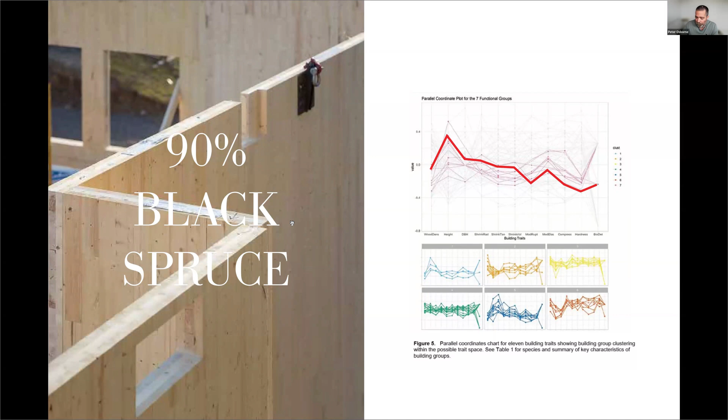And the concern about that is that black spruce responds to only a single functional characteristic, a single niche within the ecosystem, and may not have resiliency in many ecosystems, many regions of North America, especially in Canada, and could actually have changing forest composition, which would impact their future provisioning of that wood in the future. So architects essentially have many blind spots.

So thinking about how our forests are changing and how wood building and the provisioning of a monospecies wood will impact the carbon resiliency of our forests is important.

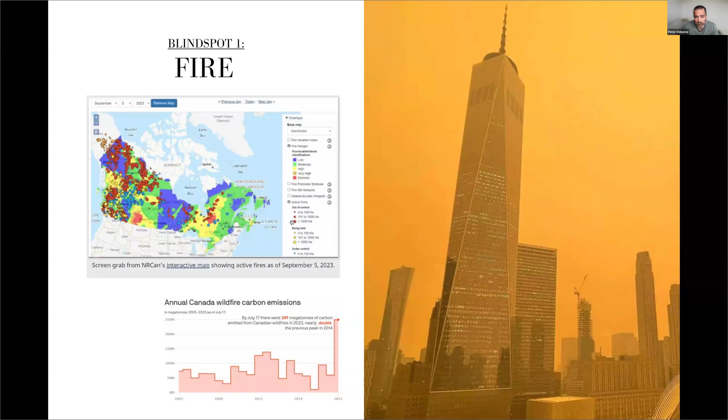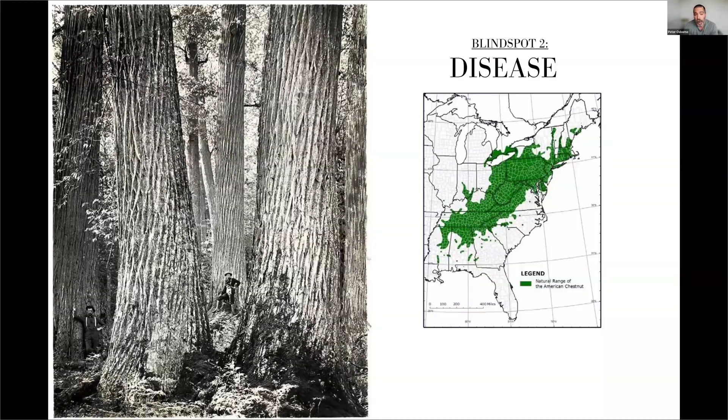The second one is disease. This may be a prolific image that you all know, but many architects won't recognize that this is a historic image from the East Coast of the United States, representing the American chestnut. It's hard to believe that we used to have such large timbers on the East Coast, but through the disease American chestnut blight this was decimated across all of Eastern North America, and something we don't see anymore.

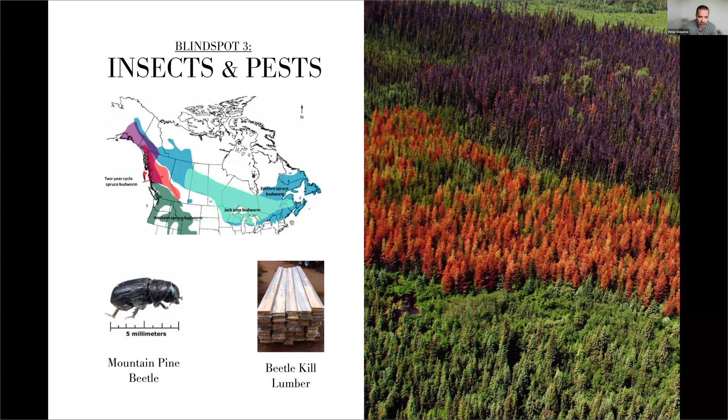A further one we don't see is the impact of insects and pests on our forests. And this starts to hint at what we call a forest building approach, where some of the beetle kill lumber is actually being harvested for high value finishes. We're able to remove some of this timber from the forest and utilize it to then support forest regeneration efforts, et cetera.

And not only are these things all blind spots, but the impact of climate change, the accelerating effect of indirect, direct, and interaction effects of climate change and all of these other disturbance characteristics is massively impactful on our forest ecosystem structures. And in this article from 2017, Seidl et al. concluded that ecosystems and society must be prepared for an increasingly disrupted future of our forests. And this is something we really need to take into account from the construction industry.

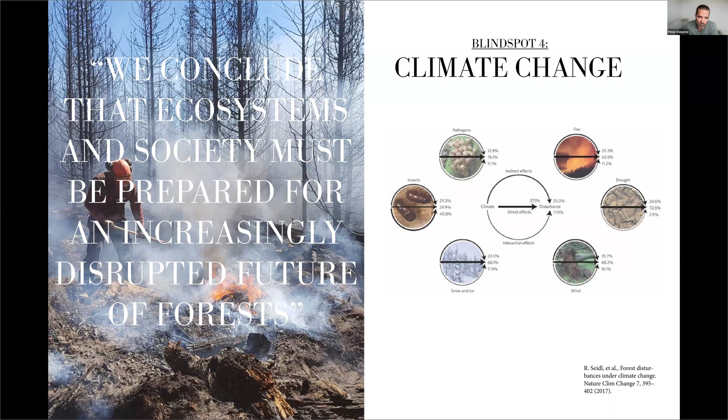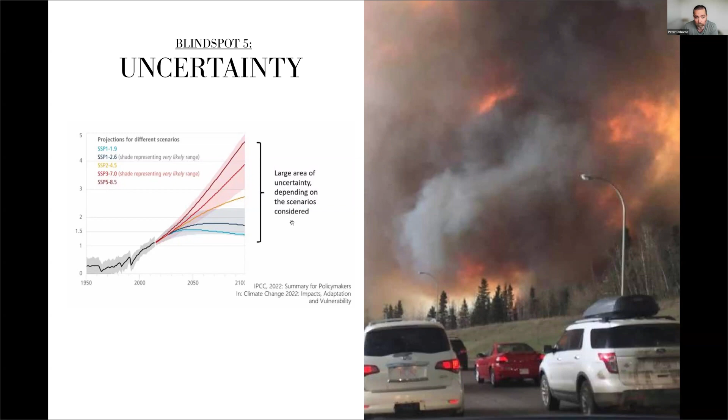Finally, on top of that, the massive amount of uncertainty that we have towards the projected futures of our climate change will really impact the ongoing provisioning of wood, and something that builders and designers and engineers need to begin to think about a little bit more. So in general, what I'm proposing here is buildings tuned to the history and successional dynamics of forests and plantations.

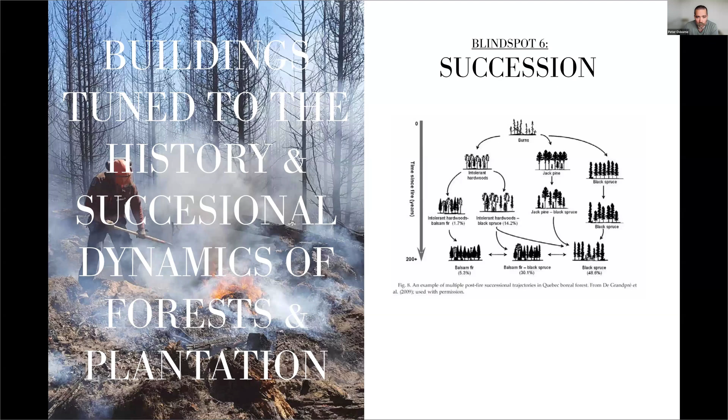So builders and designers that understand how forests change and how they can support that change, as opposed to one which applies a top-down approach that demands a certain type of wood from our forests. So just as ecologists have moved from species to functional traits and created new forests in the process, what I'm proposing here is buildings need to move from building using certain species like SPF commercial groups to a building trait-based approach towards construction.

And by doing this, we'll extend the ecological concept of plant functional traits to building. And plant functional traits and building functional traits are extremely relevant. From an ecological perspective, the functional traits, and I'm sure this is something you all possibly have deep knowledge of, could be things such as wood density, seed mass, height, specific leaf area, leaf nitrogen, drought tolerance, shade tolerance, and root depth. Whereas on the building side, they can be anything from the physical and mechanical properties, thermal properties such as emissivity and diffusivity, biodeterioration or rot resistance, fire resistance, and suitability for wood preservative applications, bonding, finishing, etc.

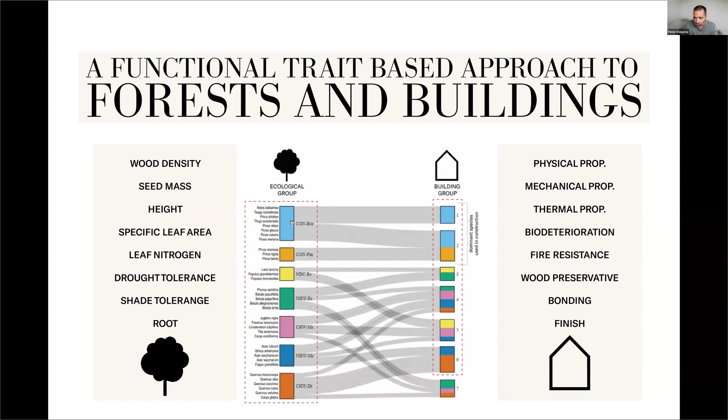But what we found was when you look at the dominant species used in construction, so SPF species, spruce, pine, fir, mostly softwoods, they only respond to essentially two ecological niches in the region that we studied. And this is obviously because they're all softwood species dominant, particularly. So how can we begin to think about expanding our wood building practices such that we can support the utilization and the diversification of our forests in order to support their resilience overall?

So the one way we tested this was to apply this kind of approach on the Centre du Québec region. We leveraged the study by Marco Mina et al. from 2022, where they looked at different forest management approaches and climate change impacts on increasing the resiliency of the region. And they had never studied the harvest output. So we leveraged the harvest output data for that study to assess the social and ecological impact of climate change and forest management change on this region.

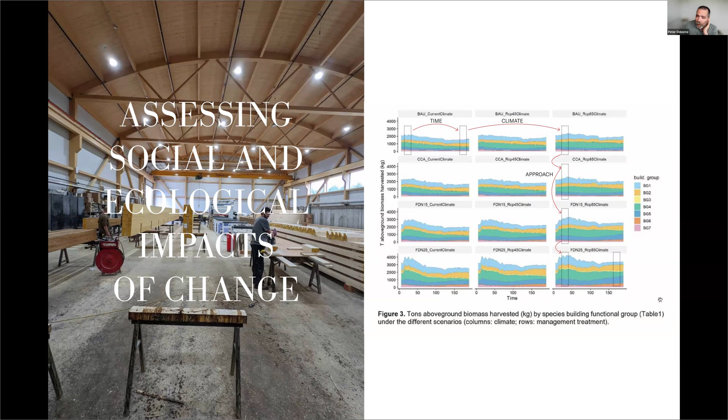So we were able to assess the impact essentially of time on forest harvest output, of climate on forest harvest output, and then different management approaches on forest harvest output. And what we found was that when forests were of low functional diversity, when the forest management was business as usual, we had relatively low functional diversity of wood utilization. So we were dominantly needing to use building groups 1 and 2 still, whereas we still had significant amounts of BG4, which is typically hardwoods, maples, and a few others.

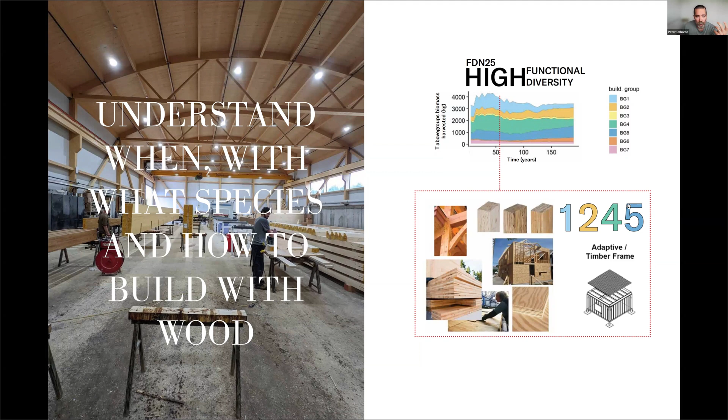But as we increased to the highly functional diverse forests and high climate change, we actually found that we drastically increased the harvested output of both the standard SPF commercial group species, so building groups 1 and 2, but also building groups 4 and 5 substantially increased. And what this allows us to do is to really understand when, with what species, and how to build with wood. And what this really pointed towards is the need to really find value in unutilized wood species.

So you're seeing here on the right in this chart, as essentially the forest becomes more functionally diverse, and here in the bottom right, we didn't find necessarily that we increased substantially the SPF species, as those weren't the ones that were needed in the region. But what did actually end up happening was over the course of the entire 170 or 190 year study period, we dramatically increased the harvested output of building groups 4 and 5, which points towards the need to find value and find utilization for those wood products in long-lived carbon stores such as buildings.

So moving to the second part of this study, this is a forthcoming article called Wood in Transition, Diversifying Wood Construction to Cope with Forest Change. We looked at ecological indicators of resiliency. So the three of them we identified were species richness, functional diversity, and functional redundancy. So species richness is obvious, essentially the number of species that can be attributed to each product.

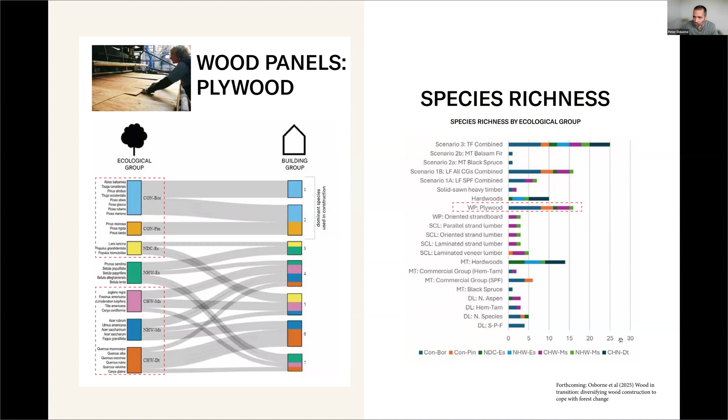So when you begin to assess this, you can look at how products like dimensional lumber of commercial group SPF have 4 species which they can utilize. Whereas when you begin to increase it to all the different commercial groups, you can aggregate them together and substantially more species are able to be utilized in them. And then comparing that to a product such as plywood, we found there were 17 different species available within the plywood market. And that makes that product a slightly more resilient product to change as they're able to adapt their systems.

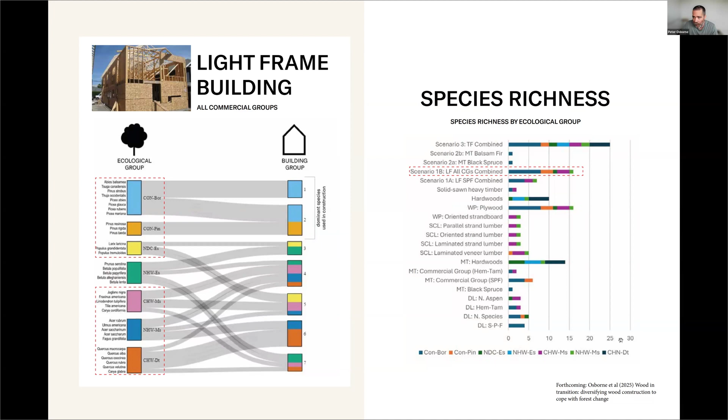And then finally, when you aggregate these things together into a construction, we're able to find even more benefits, where the SPF species and then the plywood together provide a unique combination. Where this becomes particularly interesting is when we begin to look at these other ecological indicators of functional diversity and functional redundancy. I'm not going to go too far into the depth of this, because I think Christian has probably introduced it and many people here know the concept in general.

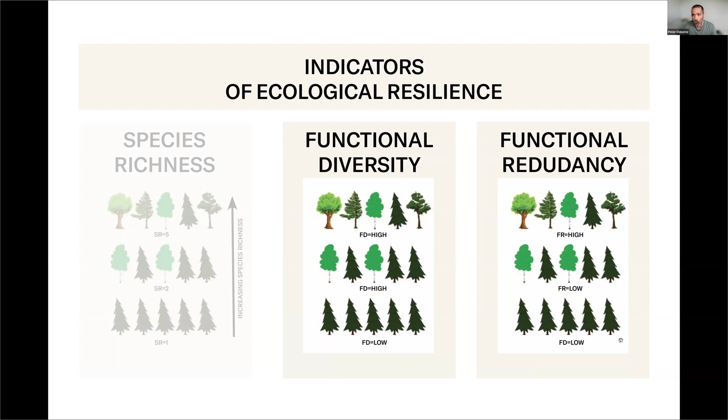But essentially what you want, for a highly functional diverse forest, is species which have ecological traits that are varied in their response to different disturbance characteristics. And you similarly want highly redundant forests, which have functional overlaps between their species as well.

So when you begin to look at the wood product characterization according to their functional diversity and functional redundancy, we find that products such as mass timber, which are a single species, typically have extremely low functional redundancy and functional diversity, as they only have one species typically that they're using, possibly one or two. This chart here is only using a single species approach.

Whereas products such as dimensional lumber often use significantly overlapping species, so many softwoods, and have a high functional redundancy but a low functional diversity. And comparing that, wood panels such as plywood, OSB, LSL, and those varied products which can utilize a higher variety of wood species, begin to develop into a much more highly functional diverse approach.

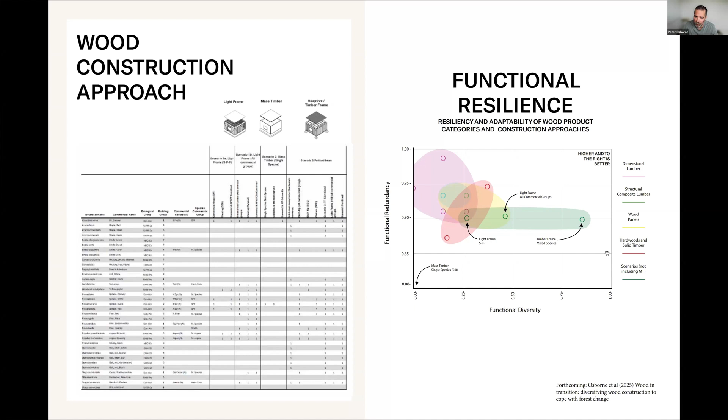And in combining these products together through light frame construction using all commercial groups, and through timber frame or this mixed adaptive approach, which utilizes timber frame, light wood, wood panels, etc., are we able to actually have a highly functionally redundant and highly functionally diverse forest.

So you can begin to understand how the forest management approaches that we're proposing, highly functional redundant, highly functional diverse forests, would be best supported by an adaptive approach which is able to use the most species, whereas a mass timber product would possibly align itself best with a very simplified forest. It's quite a simple concept, but depending on the direction you're going here, if this is a demand or a supply side approach, that really has an impact on how we're working with our forests and our buildings.

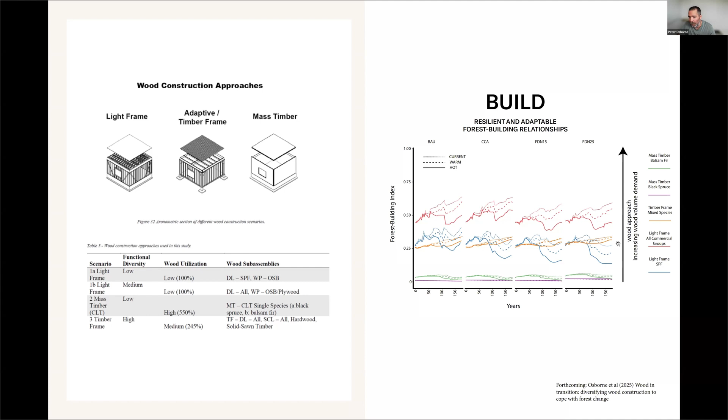But what's particularly interesting about these tables and charts is that you can see how in the timber frame mixed species, the line is relatively flat, which shows something about the impact that will have on the industry in general, showing that, as climate change moves forward, as these disturbances occur, the industry is able to shift and adjust itself in order to maintain consistent supply. Whereas the light frame approaches are impacted quite considerably depending on the different climate change scenario that we're looking at.

So finally, I want to talk about the carbon impact, because that's really where this question began. So this second forthcoming article that I'm writing in collaboration with the Canadian Forest Service, on enhancing forest carbon sinks through functionally adaptive wood construction, will be coming out hopefully this year.

But my question here is really, what is the impact of a functionally adaptive building practice on the land-based carbon pooling potential of buildings? So again, we utilize the same study region, and we really wanted to understand how much carbon can be stored in the wood-based carbon pool of this forest region. So we developed a species-level forest carbon model using the Harvested Wood Products model developed by the Canadian Forest Service, where we looked at essentially everything after the forest.

In further studies, I'm hoping to actually include the forest carbon into this, because I think that's a really critical element, but this is the system value that we're looking at. So everything from the production to the use in building and then its eventual end of life.

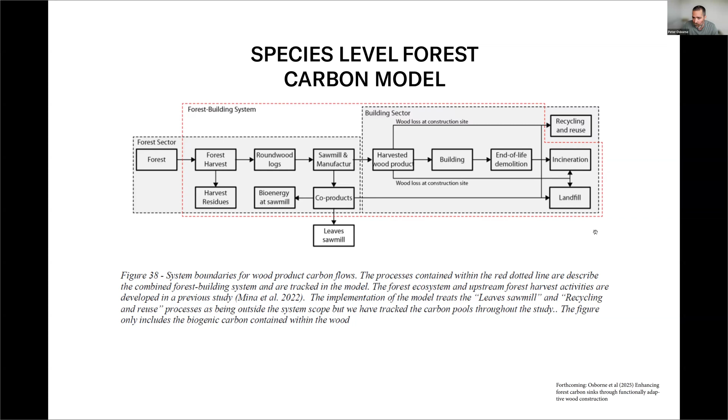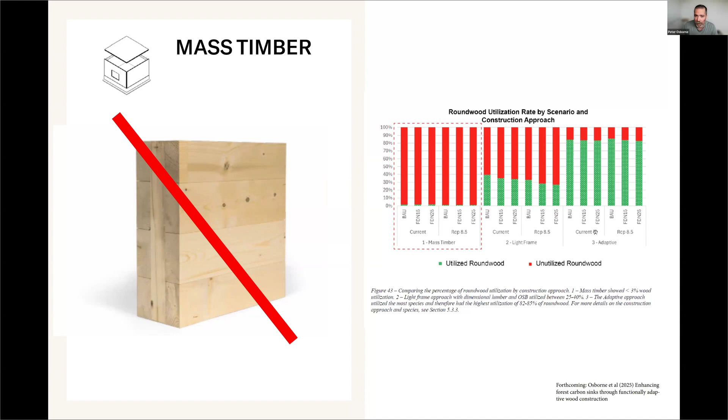And what became really evident when you looked at the utilization rate by each scenario for this region especially, is that mass timber was just not at all suitable. There wasn't enough of the species that was utilized in it. Whereas when you look at light frame and the adaptive approach, we're reaching something around 40% for light frame and upwards of 80% utilization for the adaptive approach.

It becomes particularly interesting too when you look at the changes between the low functionally diverse forest and the high functionally diverse forest, where you're seeing a pretty considerable increase in wood species utilization. So the diversity of wood species, which was evident in the last paper that was discussed, but as well as the significant quantity differences and changes over time or between the two scenarios.

So what's important to think here is how does the building's fingerprint match onto the forest output that we're seeing? And then finally, the other element that we really wanted to jump into is the actual byproducts that are coming out of these different approaches. One of the really important aspects of this is the percentage of utilizable wood within each of these approaches. Softwood species often have around 80% utilization, whereas hardwood is more around 45%. This is a broad generalization, and I'd love to get into conversation about more specifics on this with the group.

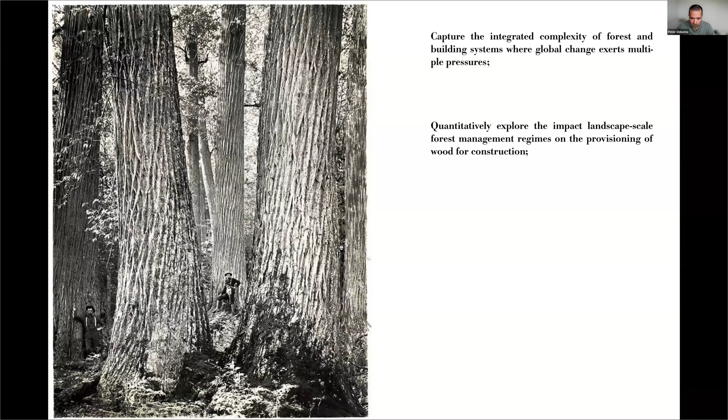When you say all wood harvested, so essentially the mass timber scenarios assume only the black spruce, or I think I had one extra species here. Sorry, let me go back to the relevant one. So there were 2 scenarios where I looked at the mass timber, using balsam fir and using black spruce. Black spruce was the one that's regionally appropriate or utilized. It exists in Canada as Nordic mass timber, mass CLT. Balsam fir has been utilized in other regions. I don't know specifically in Canada if it's been utilized right now, but at the time of the study, there were other regions using balsam fir. So those are the only 2 species that were utilized in the mass timber scenarios.

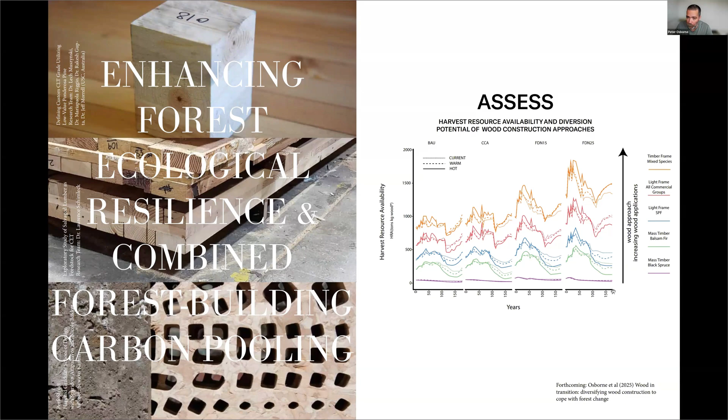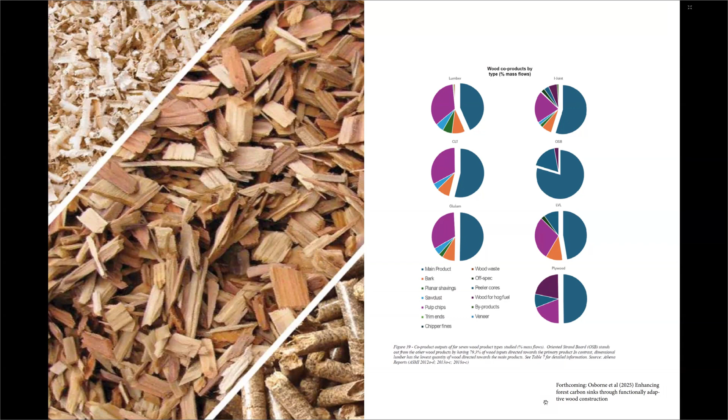And then when you look at the utilization for each of them, you're seeing essentially the co-product. So roughly 55%, more or less, of the actual wood product made it through to the building at the end of the day. Does that answer your question, Matthew? Yeah, thank you, Peter. I guess it assumes that for all the other species, nothing else is harvested. No, it's harvested but not utilized in long-lived wood products, i.e. buildings. Oh, I see. Okay.

Yeah. So essentially the adaptive approach is one which assumes a flexibility in the system, right? So it allows for there to be a CLT diaphragm under some scenarios. It allows there to be post and beam kind of structure frame, and then light frame infill, if you understand the kind of concepts I'm talking about within the construction system. So there's some more work I think to do on diversifying the different scenarios and being very specific about them. And that's where we're going with this study.

Great, really interesting work. Thank you. Thanks, Michael, happy to talk more about it. Yeah, for sure.

Our next question comes from Clément Hardy. I'm curious to better understand the relation between the numbers that concern the increase in carbon stocked, one of your last slides. If I stock 100% to 300% more carbon in buildings, does that also mean that I harvest 100% to 300% more wood?

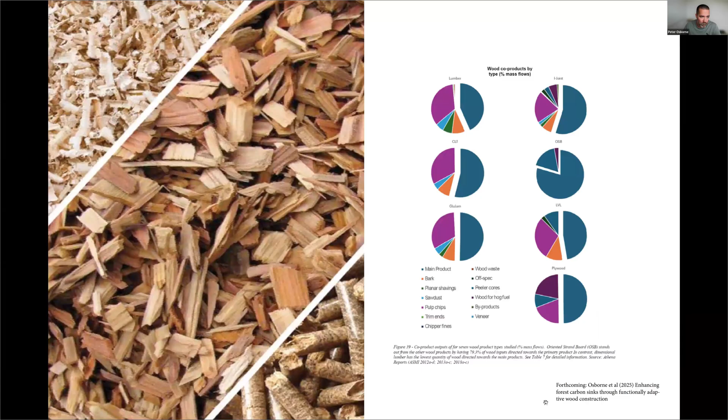No, so essentially, you're referring to this. The wood harvesting scenarios were consistent, or they had the same harvest output, depending on each one. It was just the utilization rate. So how much of that wood that was harvested is diverted to a wood building versus non-wood buildings. So essentially by going from a light frame construction, this approach right here, to the adaptive approach. If I wasn't as clear, I got a little bit tongue twisted.

Under the current approach it would increase the wood utilization in buildings, so the amount of wood carbon pool, by 105%. Whereas if you were in the extreme climate change scenario and the extreme functional diversification scenario, it would increase it by 295%. So that's the connection between the two of them. Both of them have the same harvest. It's just how much of it is actually able to be utilized in what I'm referring to as long-lived wood products or wood buildings. Primarily because putting wood into a building is one of the most likely ways for the carbon to stay locked up. Does that make sense, Clément?

I'm assuming he's saying yes. He says yes on the chat. Perfect. Perfect.